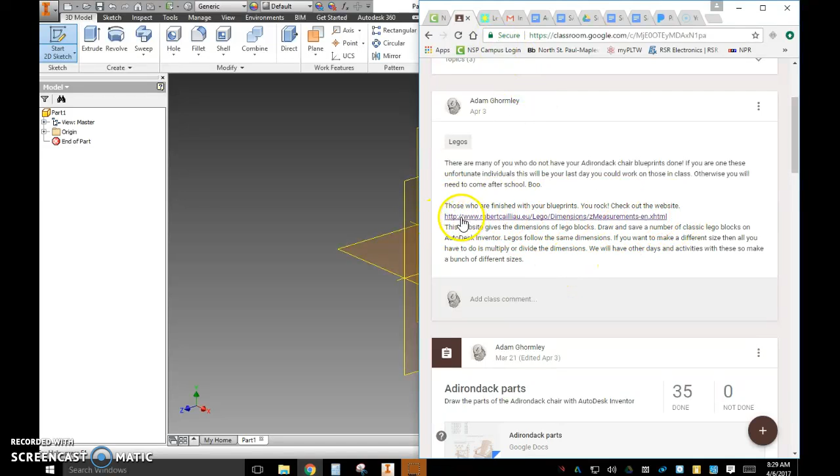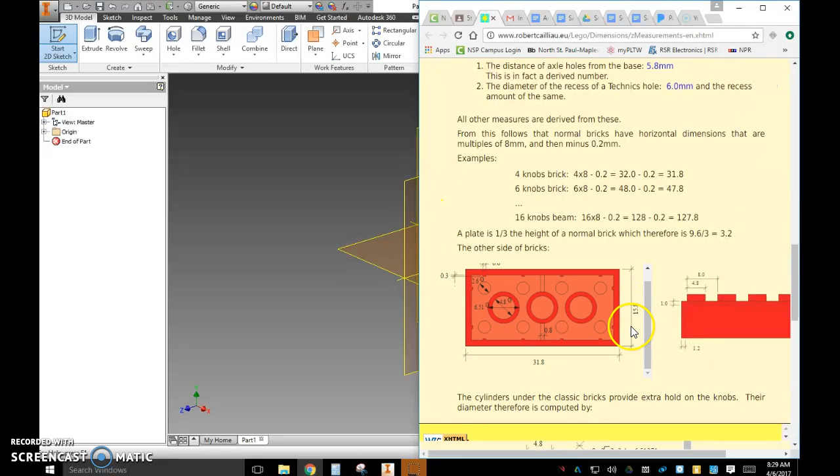Now, I gave you in this announcement here this website. You go to the website and there's a lot of information here. And yes, you can look at all this and go, ooh, I don't know, but scroll down till you get here to the classic brick. Now, by looking at this and this right here, we can draw these shapes. So we're going to draw a brick, we're going to use the 2x4. So we've got 4 pegs here, and there'll be two rows of them. Okay, 4 pegs or 4 knobs here.

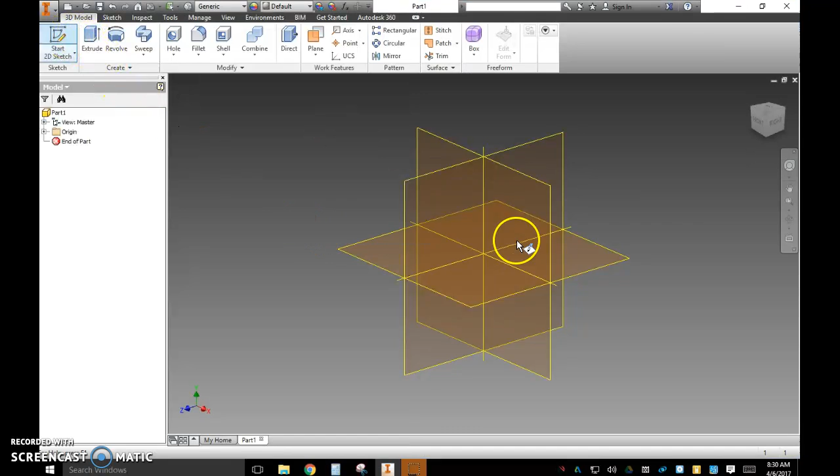So here's what we're going to do. We're going to draw this profile first. And if we look, we can see the rectangle is going to be 31.8 by 9.6. So I start my sketch, get my rectangle. Boom. Dimension 31.8. Enter. Double click my scroll button. And 9.6. So we have that. We finish our sketch.

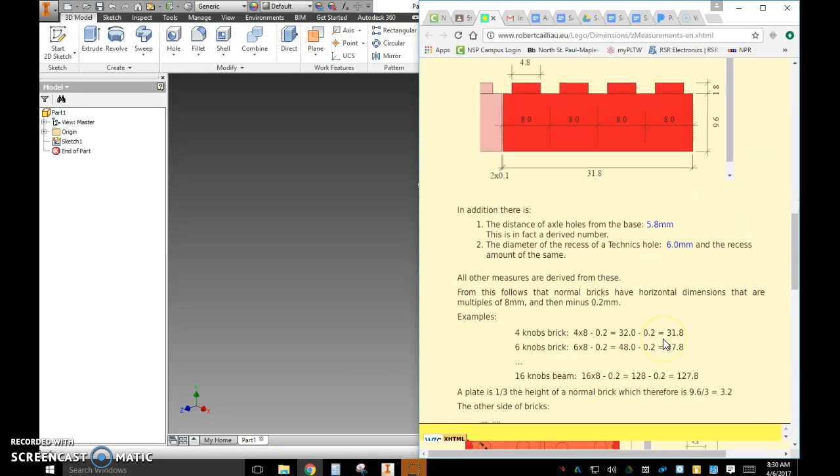Now I need to know how much to extrude it by. So I'm going to go again, look here. Do I know how deep that is? No. So I'm going to scroll down here. And what does it tell me? It says we have 15.8. So I'm going to extrude by 15.8. So that is the general size of the Lego brick.

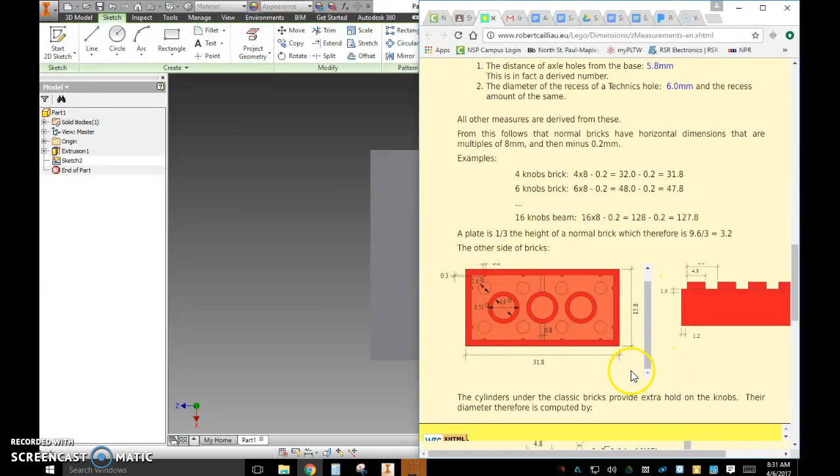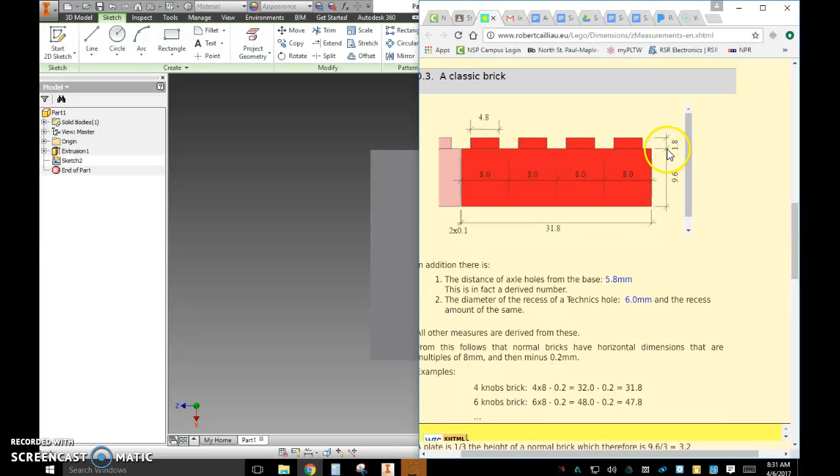Now next what I want to do is draw the pegs on top. So if I go to here, I need to look and see, well, how are these oriented here? Okay, so the cylinders, let's scroll this over here. Okay, so what we want to do is align these up. So first we know that from here to here, that is the diameter of the peg. So we know that it's a 4.8 diameter. I look here, I'm looking for height. I know that it's 1.8 in height. And I know I need 8 of them.

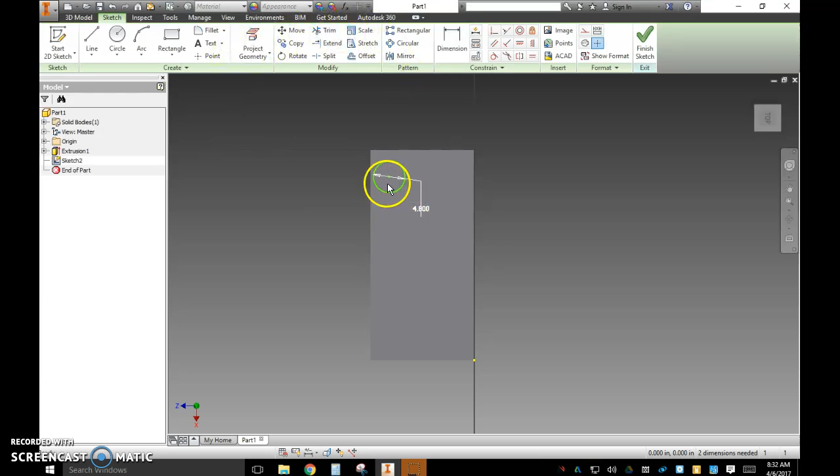So we're just going to first place these around. And what did I say? 4.8. So I'm going to dimension 4.8. Okay. And now what we're going to do is just draw more of those. So we're going to need 8 circles.

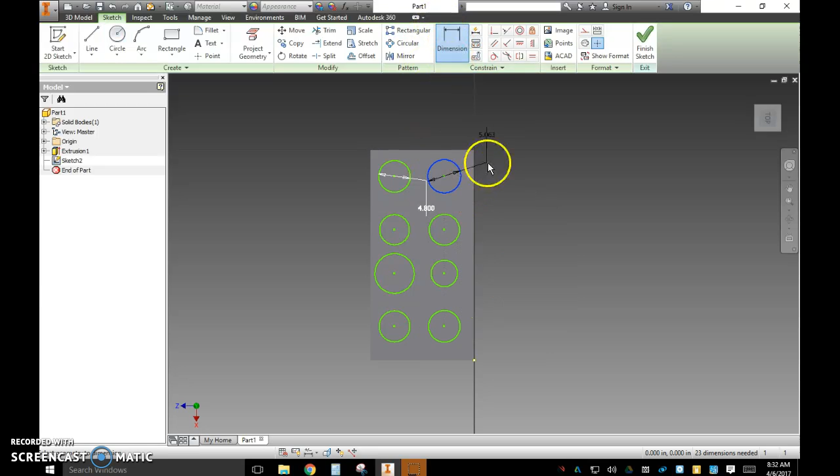There are tools that we could use to make this easier, because we can duplicate things, but we're not going to go there yet. We're going to keep this simple so that we all can get this done. So now I have all of my circles dimensioned out to 4.8. So now I need to get them all situated in the right spot.

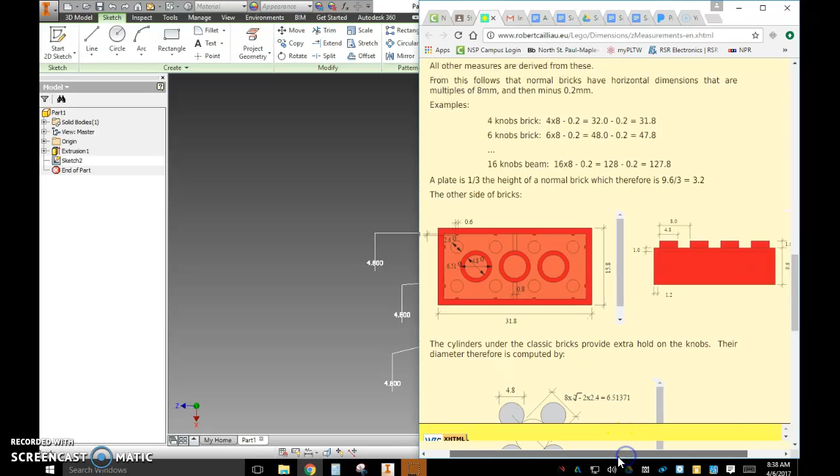And some of you are going to go, well, where does that say that? I don't understand. So we're going to look over here. And you're going to see that we have this, and you need to make some assumptions or do a little math to figure this out. So we see that one peg is 4.8 in diameter. And if we go from the same spot to the starting point of our next peg, it's 8. So we can measure from center point to center point as 8.

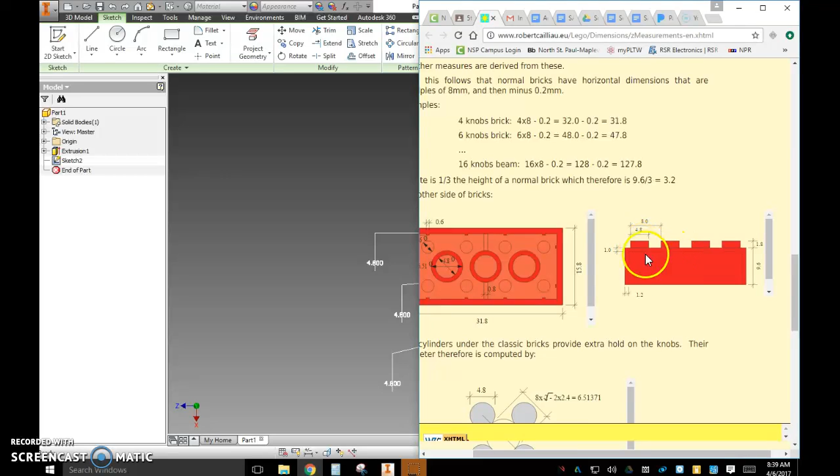I know you're going to go, wait, that measurement goes from this point to this point. But if we move this over to a center point, this would move over to this center point. So we can tell that these things are 8 millimeters away from each other. So we're going to dimension each one of these 8 millimeters away from each other. So I can go from here to here. This needs to be 8. Here to here, that needs to be 8. And then also from here to here needs to be 8.

And you'll see I've done here and here. Now that I've done this, this will automatically be 8. And see, it's going to tell me that. So I don't need to do that. So there, 8. Here, 8. And here, 8. And center line to center line, 8.

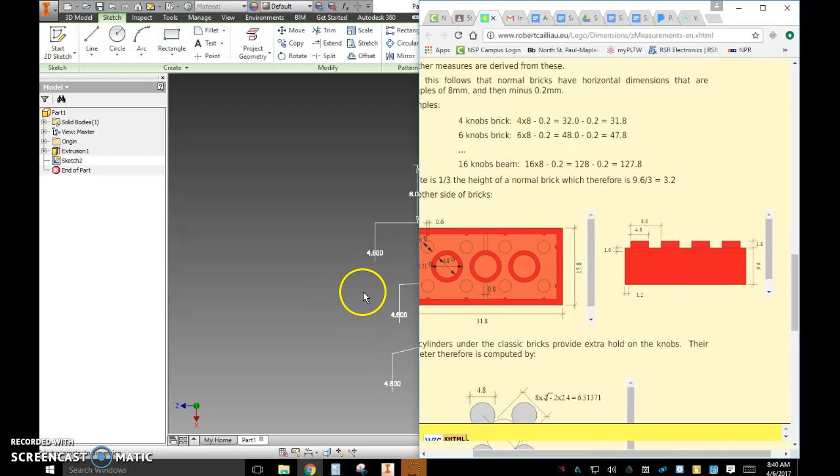Now, the last thing you're going to look at and go, well, wait a second. These aren't centered on our block. So again, we have to make some mathematical assumptions. If we look here, we know that each peg is 8 millimeters apart. And if we put 2 blocks next to each other, they have to fit together. So that means if I had another block over here, this peg would have to be 8 millimeters from that peg. So the block, it has to be halfway. So from this line to this line, I need to project my geometry real quick to get my yellow lines.

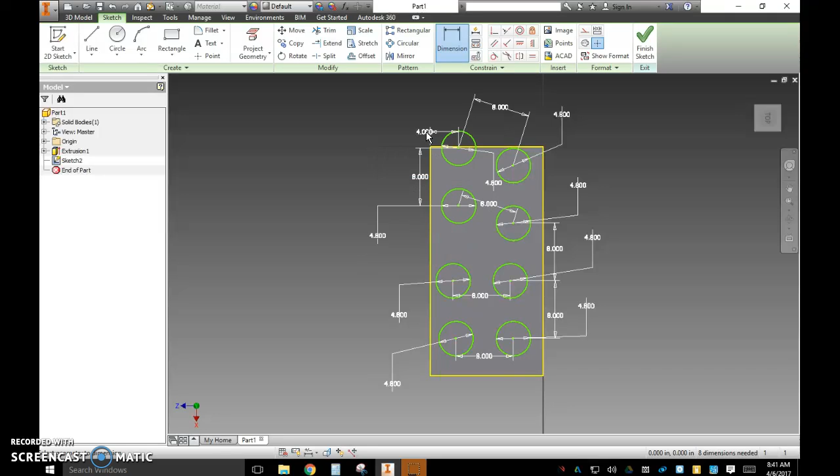So I dimension this line to this line. That is going to need to be half the distance of 8, so 4. And here to here will need to be 4. So I need to make sure I've got, looks like I need to fix this here a little bit. There we go. 4.

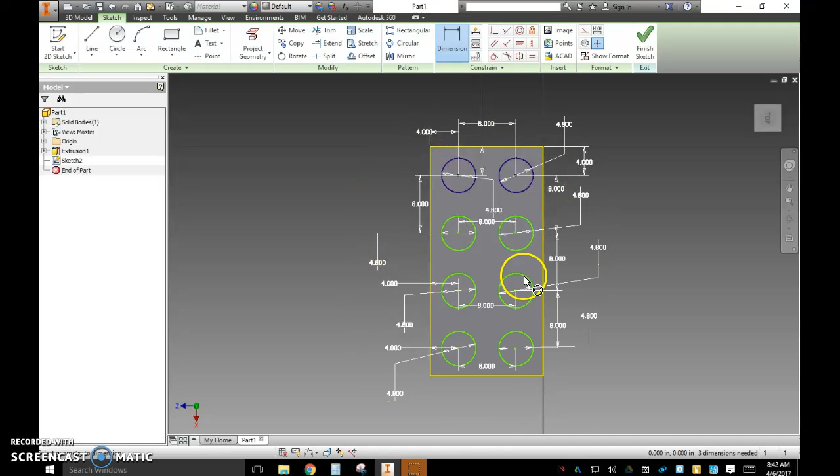And then we'll go here to here. 8. It looks like I'm still off a little bit on this one. So we'll go 4 here. 4 there. And now it looks like we're pretty centered up. There's a lot of dimensions there, but now it's all sorted out. So we finish our sketch.

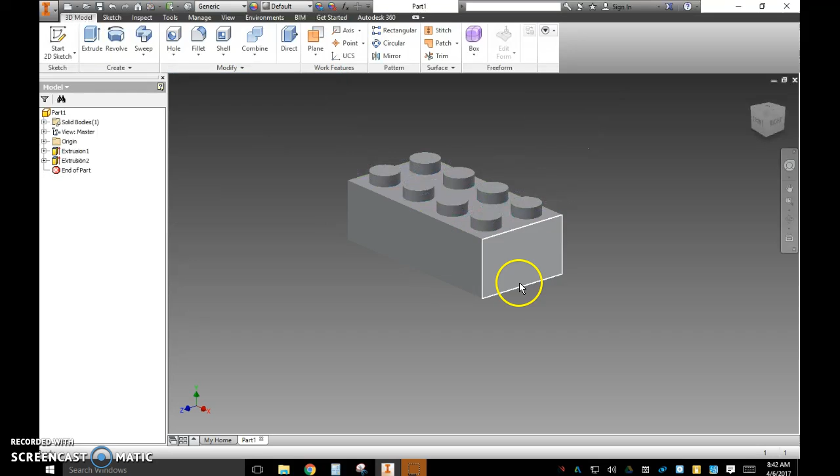I'm going to extrude, and I pick each peg. And real quick, I'm going to check, well, how high are these pegs? We look, 1.8. So I'm going to type in 1.8. Hit enter. So now I've got my pegs. Well, the problem now is I need to shell this out.

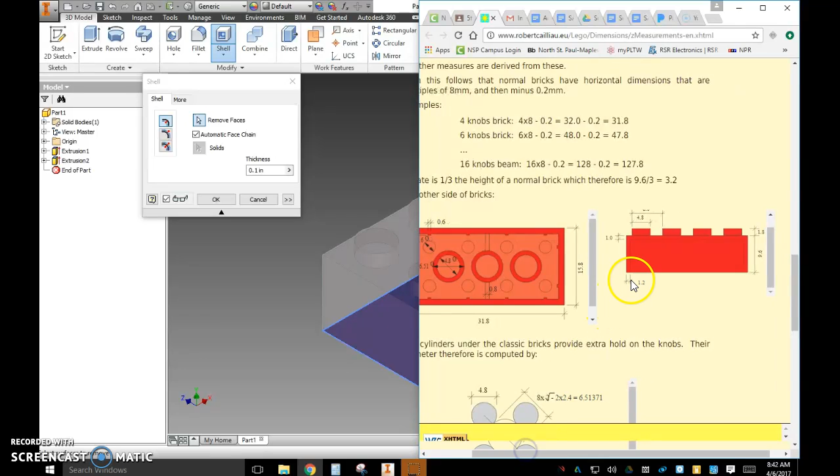So I'm going to use my shell tool. I'm going to pick this face, so we're removing the faces. And what we need to know is, well, how much of a shell do we want? And if I look here, we see it should be about 1.2. So you can see right here, the shell should be 1.2. So thickness, we're going to go 1.2.

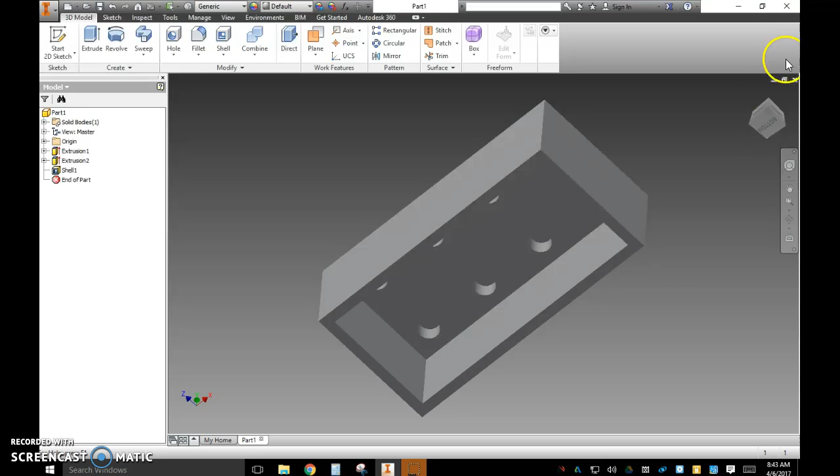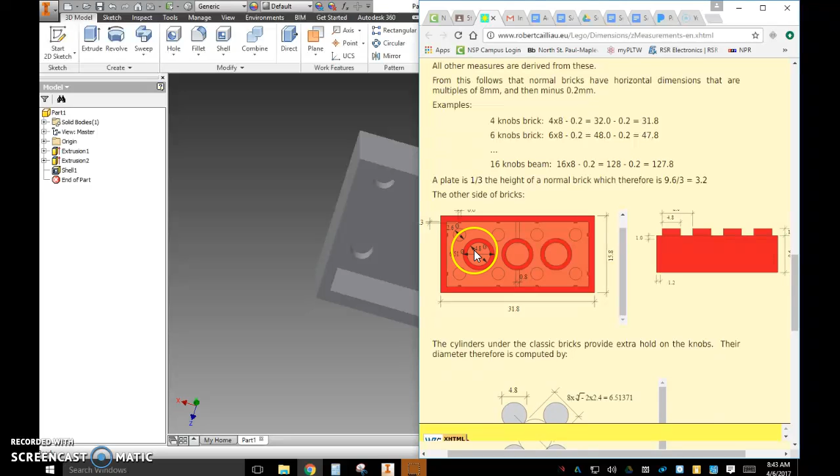And if you see, now it has hollowed everything out, so everything's at a 1.2. We click OK. And now you'll see we've got the hollowed out section of our Lego. So we're almost there. Next, we just need to draw these circles right here. And again, this is going to be simple. All we need to do is center one, and then we can build the other two off of there. So if we look here, we're going to need 2 circles, one at 4.8, the other one at 6.51. Inside circle will be 4.8, outside will be 6.51.

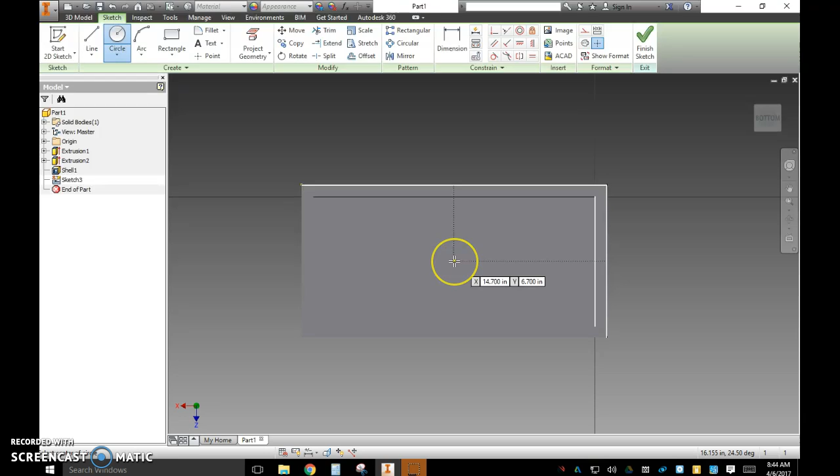So I start my sketch. I'm drawing on the inside. Get my circle tool. I'm going to find the middle and the middle. And you see how I did that? By going on both lines. So I started here, green dot down, and I started over here, so they both light up. And I follow my dotted lines, and that's the exact middle. So I'm going to draw one circle, draw a second circle. Dimension the second one at 6.51. I believe that's what it said. Yep, 6.51. And the other one at 4.8.

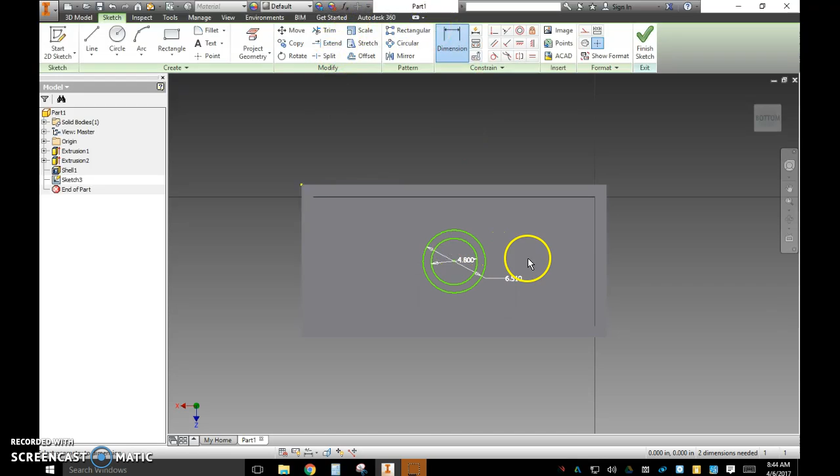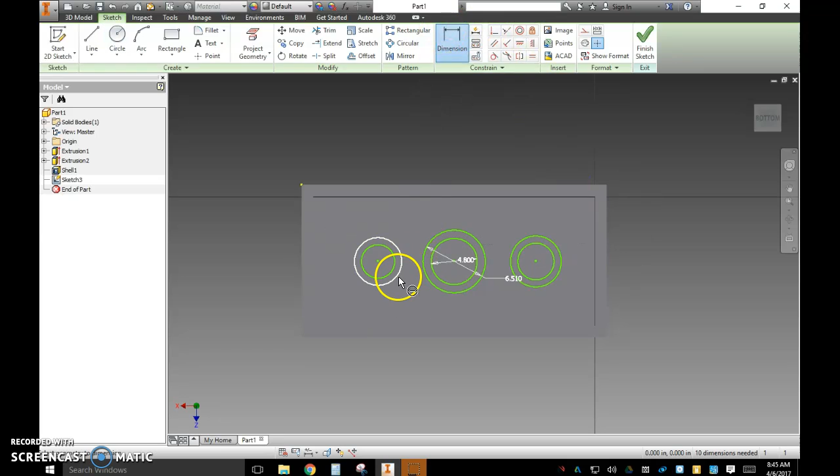Okay, so now we're going to draw two more circles. And I'm going to line these up here. One circle, two circle. Again, follow my line over, see my dotted line. One circle, two circle. Dimension 6.51, 4.8, 6.51, 4.8.

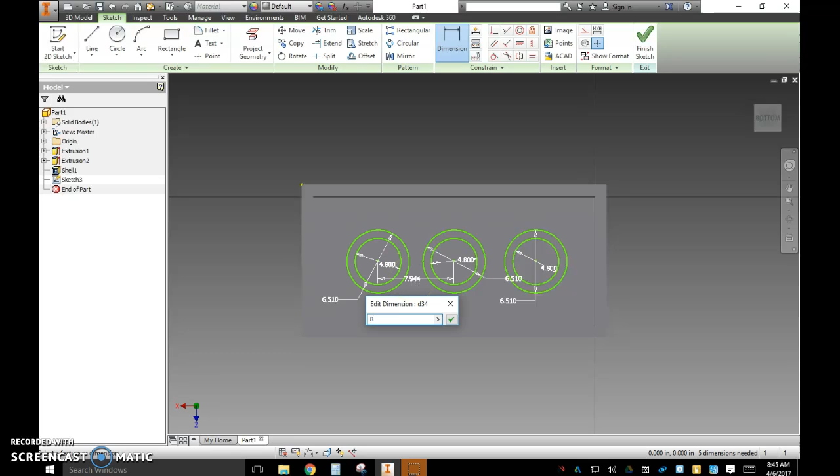Now, we're going to need to make sure that these are properly spaced apart. So, remember, these need to be 8 millimeters away from each other. Here to here. 8. And there it is. Oh, but it's moved this. So now I'm going to have to make sure that I'm centered, which I need to check. So, what was my total distance here? It's 31.8. So, we need to figure out what's the halfway. 31.8 divided by 2 equals 15.9.

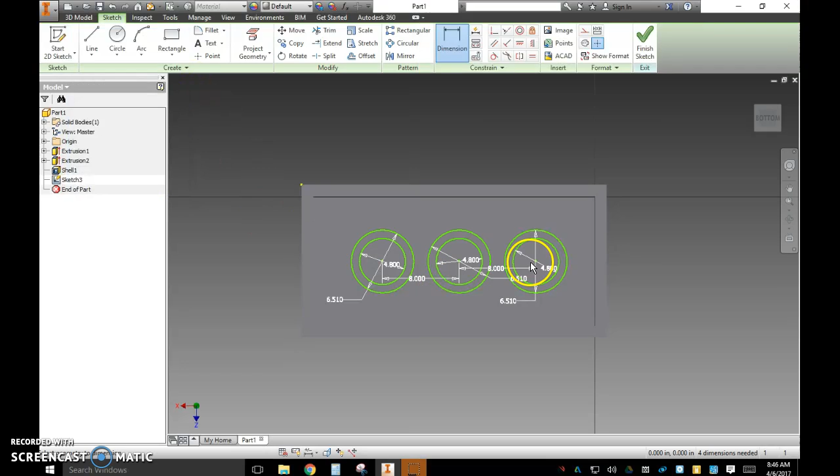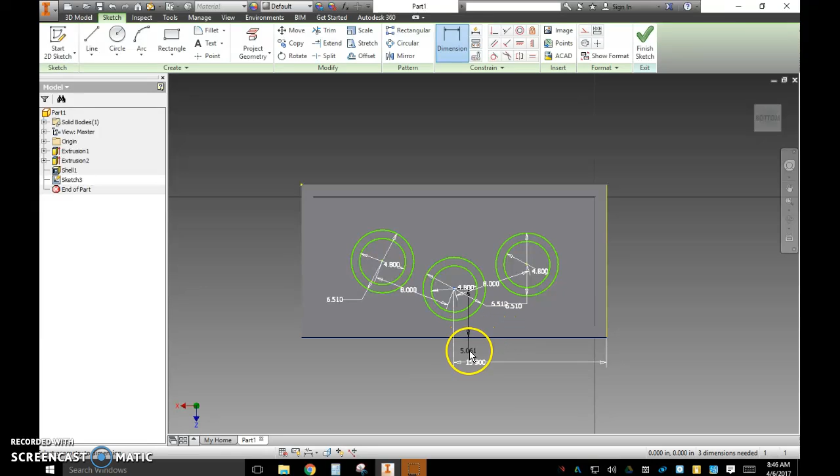So, we're going to dimension here to here. 15.9. And then what was my width? 15.8. So we're going to clear this. 15.8 divided by 2. 7.9. 7.9. Boom. And it looks like I'm going to have to do that with these two. Okay, that's already done. And it looks like we're good. Okay, so finish my sketch.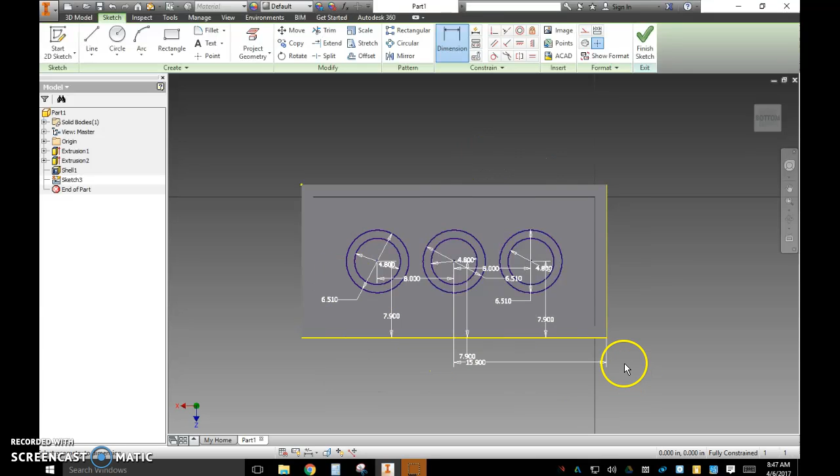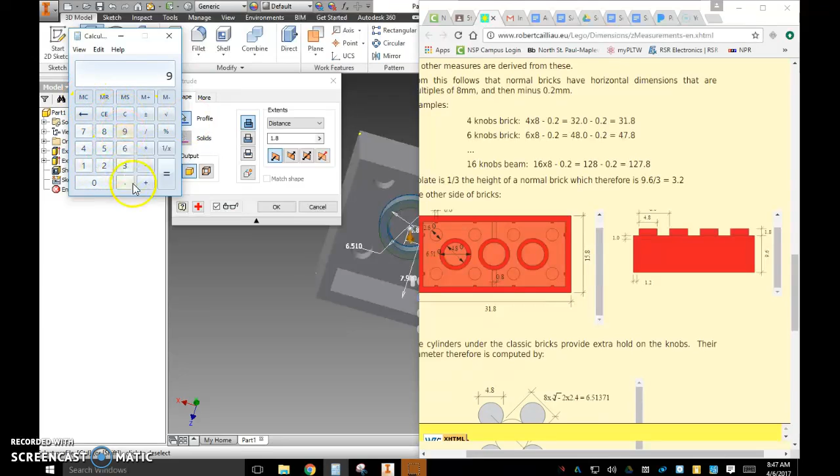Extrude. Boom, boom, boom. And we need to know how much we should extrude it by. Well, let's think about this. Again, we have to do some math. So our total height was 9.6. But we have a shell of 1.2. We've drawn on this bottom part right here. So I'm going to go to my calculator. 9.6 minus 1.2 equals 8.4. That is what I need to extrude it by. And if you look there, there's my Lego. Alright? Good luck with that.

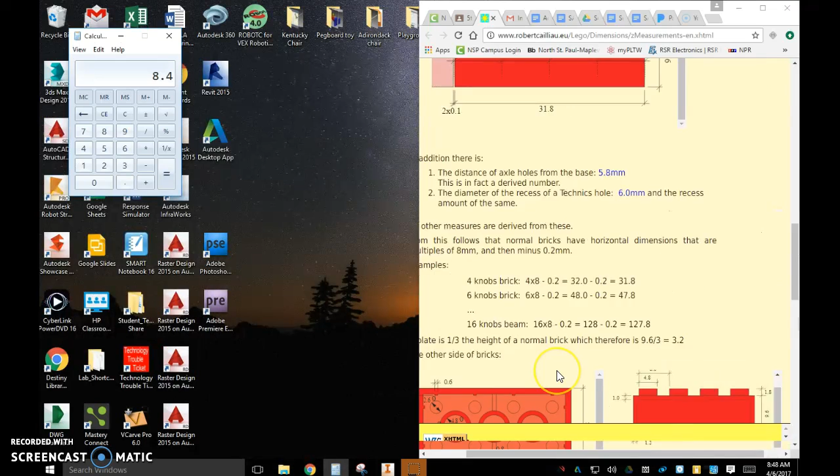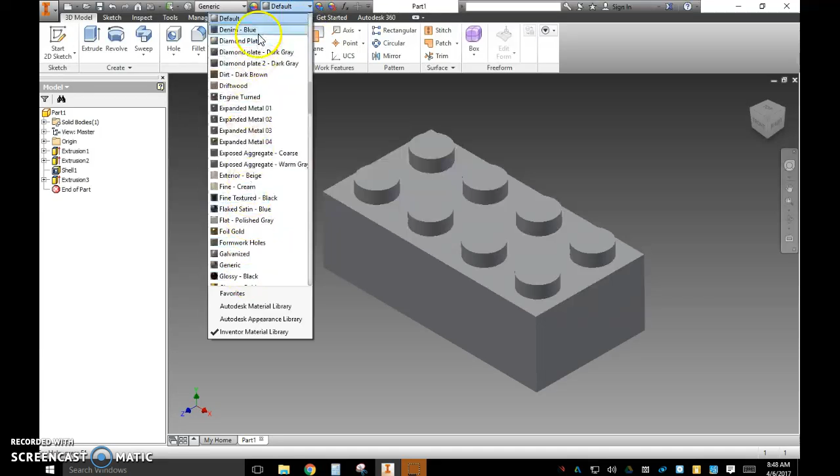Now, the thing is, if you wanted to make a different shape, if you looked up here, each peg is worth 8. So if I wanted to cut something off of there, all I would need to do is cut off 8. And then I could make a 2x3 or anything like that. Regardless, I do want you to get this far. If you wanted to change the color of it, you could go ahead and change the color. We're going to go denim blue. Boom, I got a blue Lego. Let's go gold. Looking flashy. Good luck with this, guys.